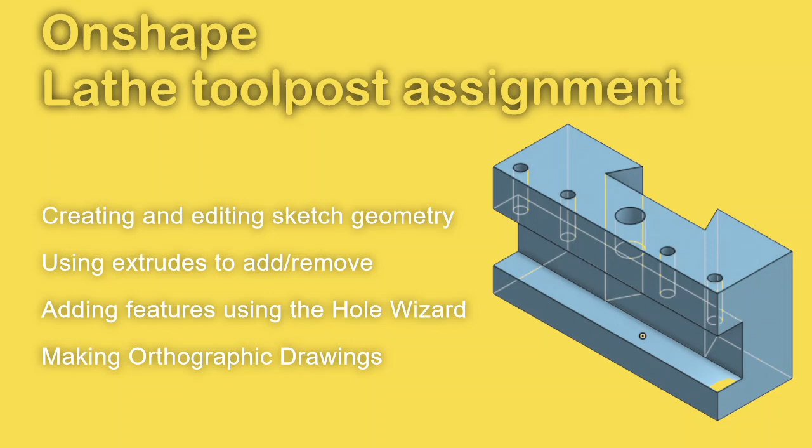Right, we're looking at trying to draw the tool post for the lathe on Onshape, and getting started. Onshape sometimes is a bit difficult until you learn the basics, and then you'll suddenly find you pick up very quickly.

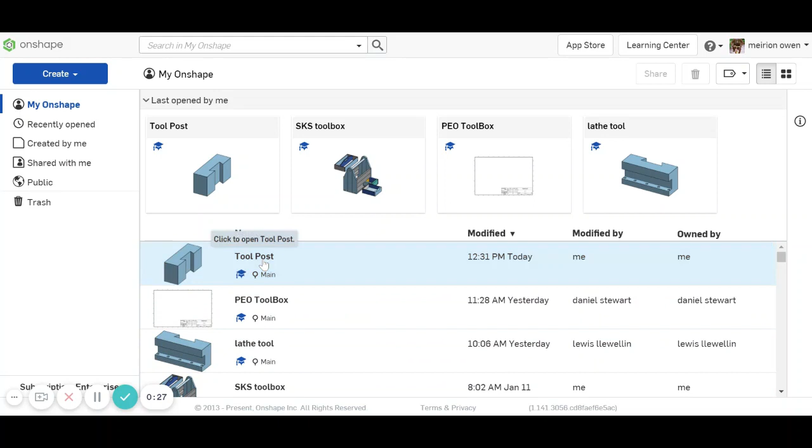Okay, let me just check first of all. If you go to your name at the top here, go to my account, go to preferences, and make sure you're in millimeters. Go back into your Onshape account a second, and go back to the drawing I was just working on, which is there.

Just making sure we're working in the right units. Right, first thing you got to do is choose a work plane that you're going to draw on. So I've clicked on the top work plane there and it goes orange. I could just as easily click on the work plane in the tree by here. It's useful to use the tree, and we'll come more and more into how the tree is useful as we go along.

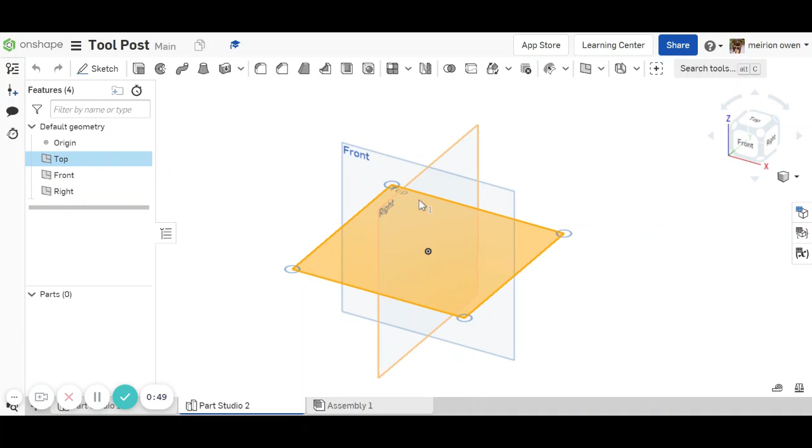Right, so that's my drawing board. Now I need to put a piece of paper on top of it. So if I go to the sketch button, I'm now in sketch 1. Good habit is to get used to labeling your sketches, so I'll call this base geometry, start. Don't tick that just yet, because it'll kick us out of the sketch.

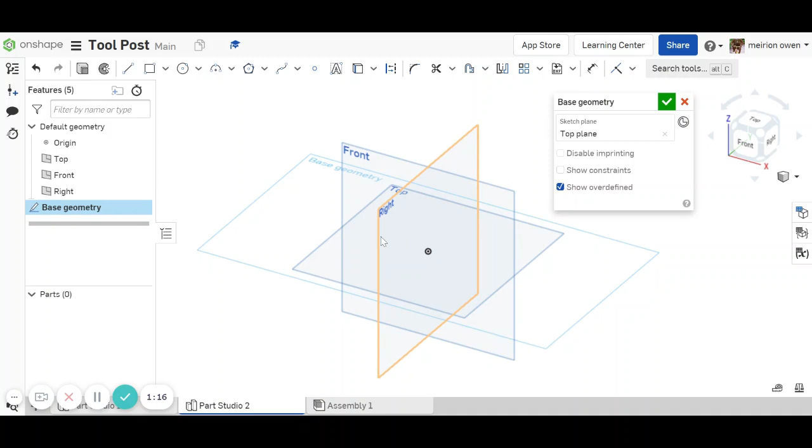Now what I'm going to do is put it into a view where I'm looking straight down on it. So I press the N button and I'm able to look straight down at the sketch. I'm going to start off with a rectangle. My rectangle's up in my draw buttons, and if I look in rectangle, I want to look for a center point rectangle.

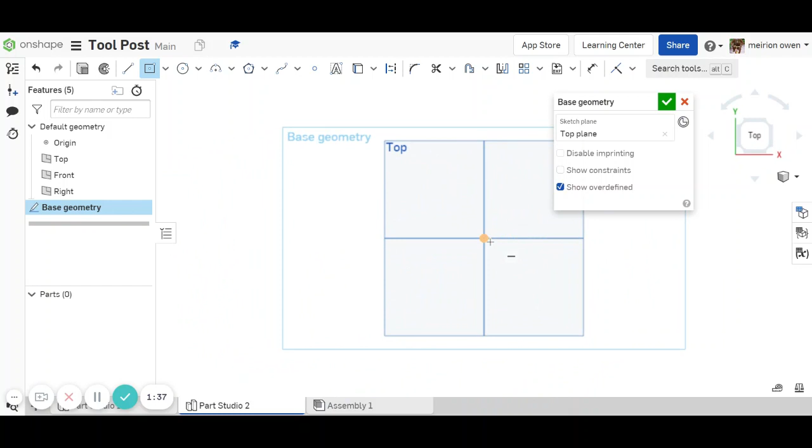Now the dot in the middle is the origin, okay? It's where all of my views meet, so always starting from the origin is a good idea. I'm going to draw a rectangle from the origin, and I'm going to dimension it.

So that's going to be 90 millimeters, hit enter. And this is going to be 30 millimeters, hit enter. So that's the base footprint shape of my tool post holder.

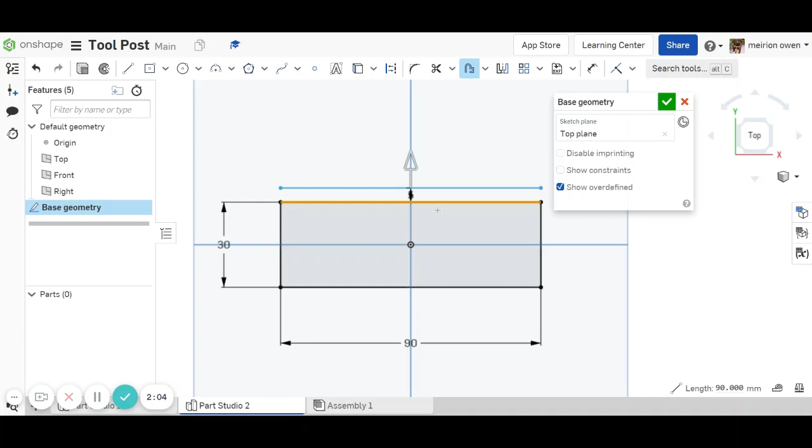Right, next thing I need to do is draw the dovetail slot that goes through it. So I'm going to use an offset button for this. Click on the offset button, click on the edge you want to draw parallel to. Now it thinks I want to draw in that direction, but I want to draw the other way. So click on the arrow, then hit enter once and type in 10, hit enter again.

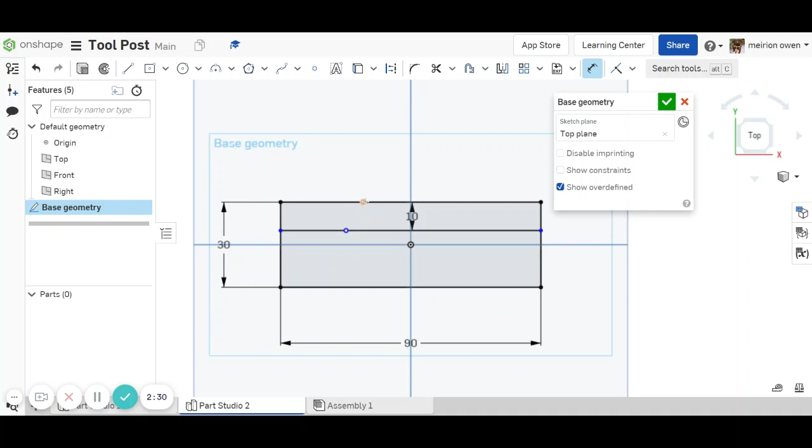Right, so that's an offset or parallel line 10 millimeters away from the first one. Now I'm going to grab my point button and draw a point on one side, a point on the other side. These points are not dimensioned at the moment, so my next step is to dimension them. I'll click on a point, click on the center line, and pull away. My first one needs to be 15 millimeters and my second one needs to be 20 millimeters.

Next thing, grab a line, join the point to the point. That's one half of my dovetail. The other half is symmetrical.

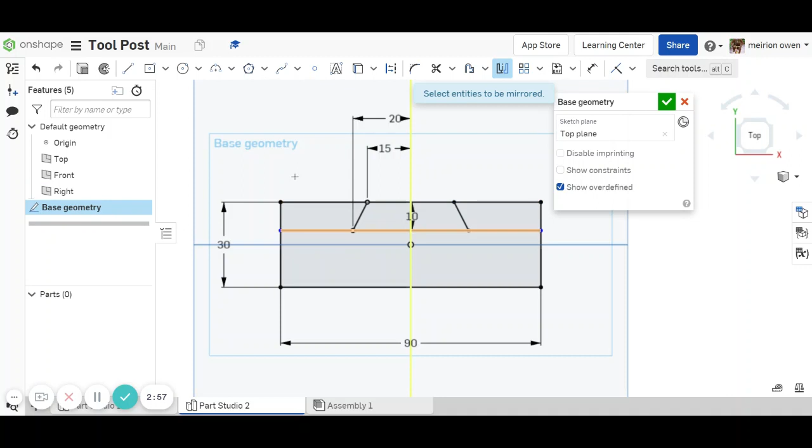So the best thing to do here is grab your mirror button. Select the mirror line - that's our center line in the middle - and then select that diagonal line, and that'll draw my other line across. Pick up the scissors and snip the bits of line that we don't need away. Okay, there is my shape that I need for my extrude.

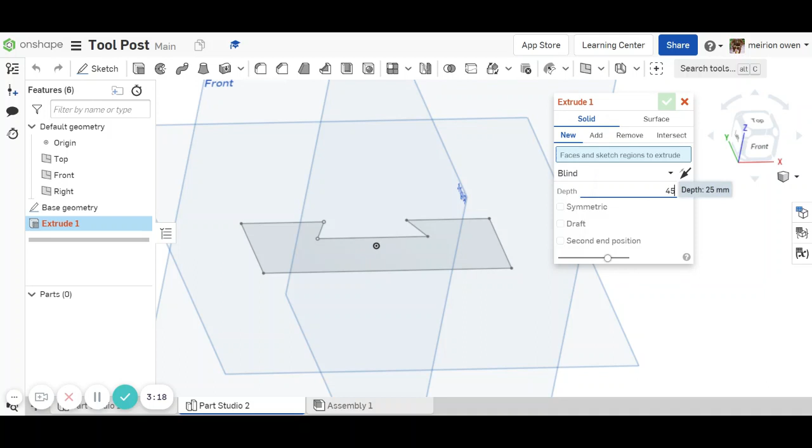So I can extrude from within a sketch, or I can accept the sketch and now do an extrude. Click on my extrude. The height of this piece is 45 millimeters, and you're going to put new material in. So here we go - click on the bit that you want to extrude, and then tick to accept that feature.

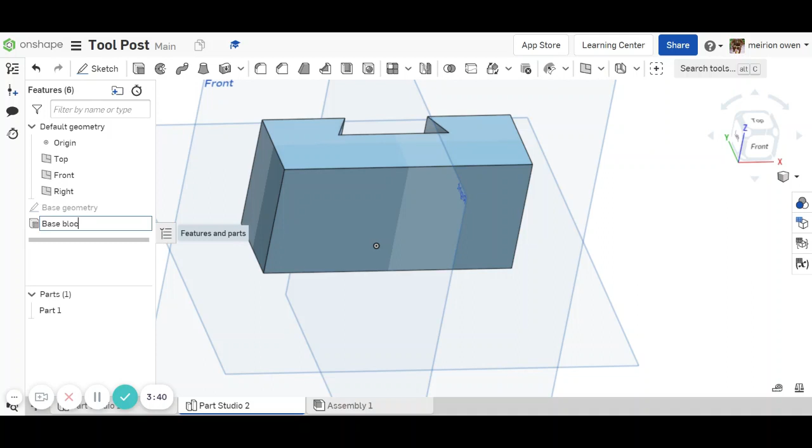So I can see I've got a sketch called base geometry, and I've got a feature called extrude. Now I can rename that feature if I want to, and call it base block, or something to remember. So now I need to put a square slot through the side of this piece.

I'm going to click on that side face there, do a sketch, click N to view onto the sketch, pick up my point, drop a point onto this edge, use my dimension button, click on the point, click on the base, pull across. This needs to be 10.

Okay, now I'm going to draw the rest of that slot in. So I'm going to go horizontal. Now you have to be careful. When you pull lines, you get these indicators - they call them attractor points. And that one there is a little symbol of 90 degrees, so if you click there, you know that line is 90 degrees.

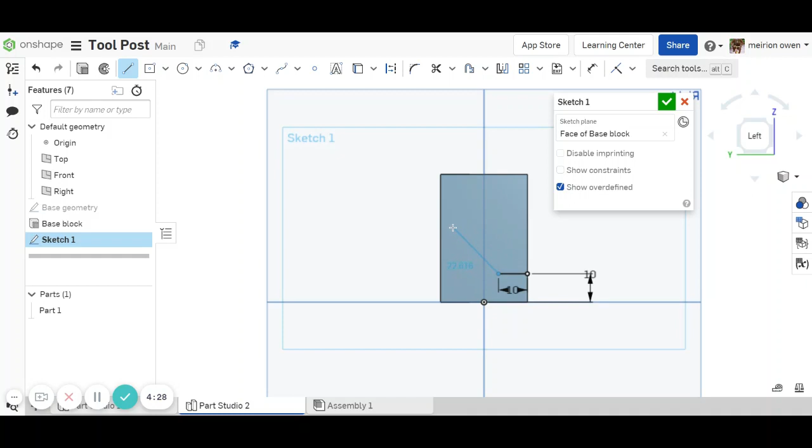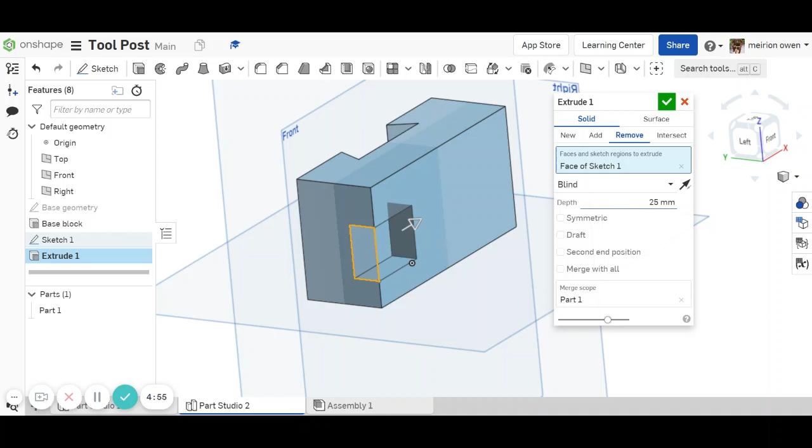So I'm going to go back to my extrude. Don't forget you can do it within a sketch. Now, if you show it the place that you want, it thinks you want to add material, but in fact we want to remove material. I could, if I wanted to, type in 90 millimeters like that, but it's probably just as easy to go through all and then click OK.

So in the last section we saw how we could make the geometry to create this block. And now I'm going to use things like the hole wizard to create some features in the block. So I've got 4 M5 holes to put in the top and one large M10 hole in the center. I'll start with the M5 holes.

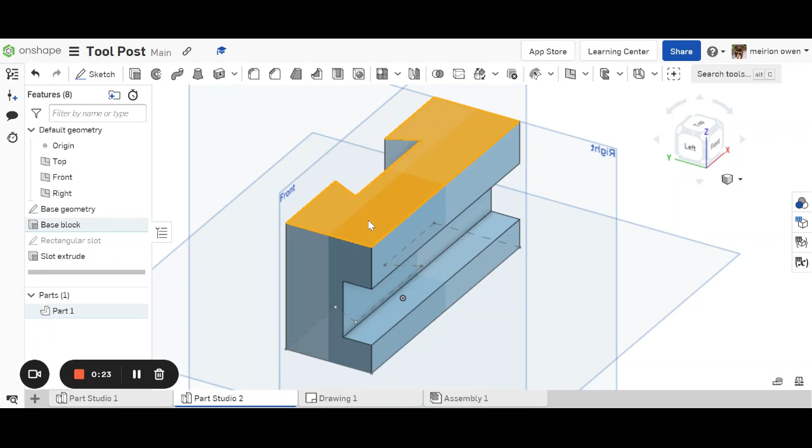So select the surface that you're going to use for your sketch. Click to do a new sketch. Good technique here is to press the N key to view normal to the sketch, 90 degrees to the sketch. And now we're just going to use the point tool to create 2 points - they just don't need to be accurately placed.

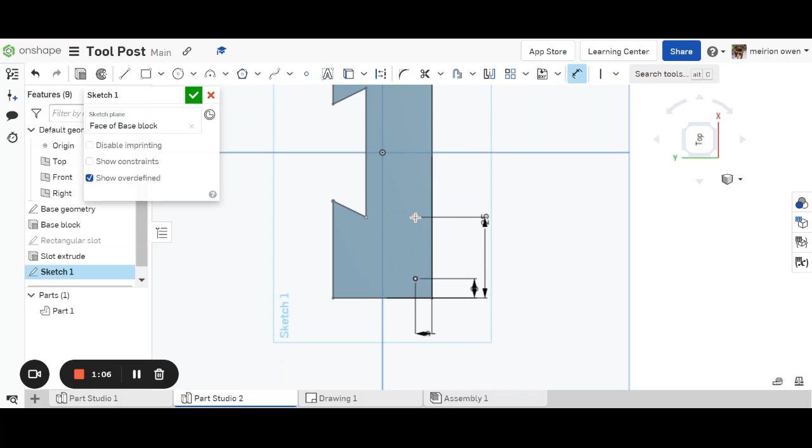We're going to dimension them now. So click on the dimension button, click on the first dot you created in a line - you can dimension that one to be 6 millimeters, and the second one you want to have as 25 millimeters. Now, the distance away from the edge you want it to be 5 millimeters, same with this one at the top, 5 millimeters. That's enough for our sketch - so on our sketch now all I have is 2 dots, 6 mil from the edge, 25 mil from the edge, and 5 mil from this long edge.

And now I need to pick up my hole wizard. My hole wizard is at the top here, and I need to put in some parameters for my hole. So the hole is an M5, metric 5 millimeter hole, and I'm going to put it on this dot, and I'm going to put it on this dot.

Okay, let's have a closer look here. See where it says clearance? That would be for the bolt to fly straight through. I want to have space to cut a thread into the hole, so I'm going to put a tapped hole in, and you can see the hole goes smaller.

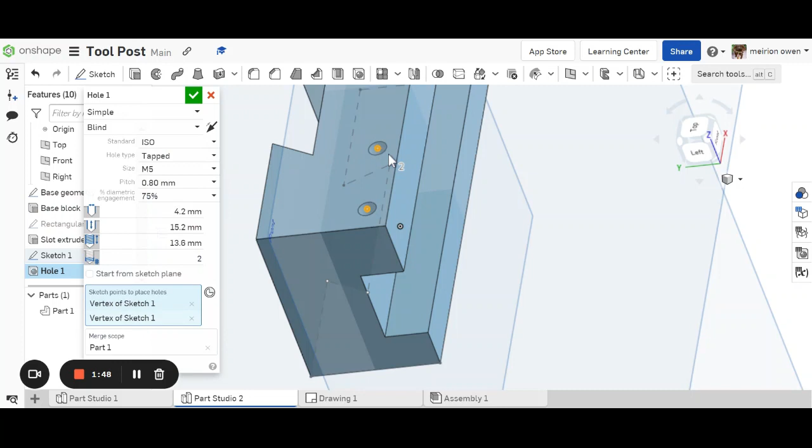Okay, now next job - look, I have got a hole that goes through the top section, but that's more by good luck than anything else, really. Look what happens if I press through - so the hole goes straight through the base. I certainly don't want that.

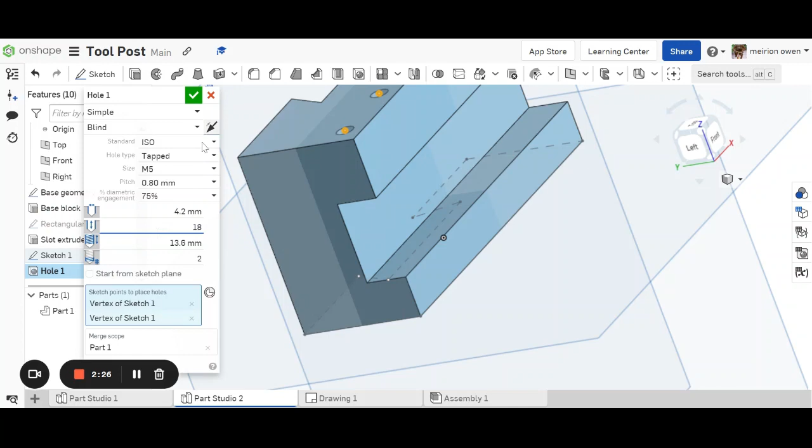So I do want blind, but let's just see how we could get that doing exactly what we wanted. So what I'm going to do is, rather than go blind, I'm going to actually put in a distance for it to run through. So where it's got 15.2, I'm going to put in 18 millimeters - I know that's going to go the right distance into the material.

Okay, so there's 2 holes there, and in my tree now I've got a hole added to there. So what I'm going to do is mirror those.

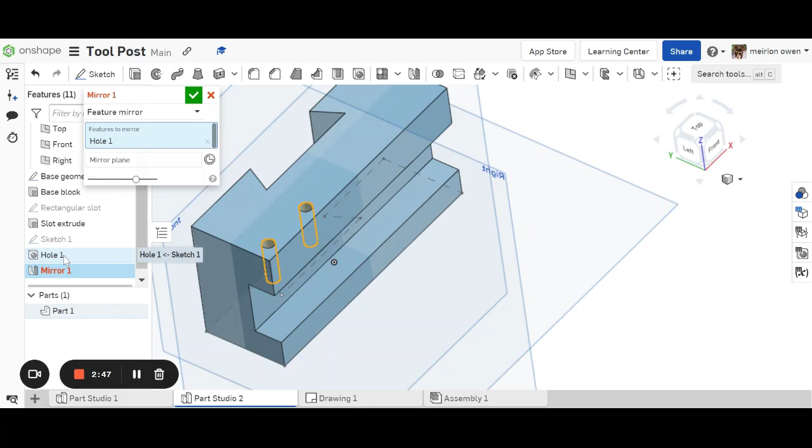So I'm going to go over to my mirror button, and rather than doing a part mirror, I'm going to do a feature mirror. I'll pick up the hole from the tree as the feature to mirror. For the mirror plane, I'll use the vertical mirror plane that goes through the origin, and that's going to draw me the other holes identical on the other side of the block.

Okay, so next job, we've got another hole to put in the middle. So let's do another new sketch in the middle. For this one, I think what I'll do is pick up an inference point. When you hover over a line, you get these attractor points, which let you draw lines without having to measure anything. That line I've just drawn goes exactly halfway along the block, and I want my point for this bit to be right in the middle of that line.

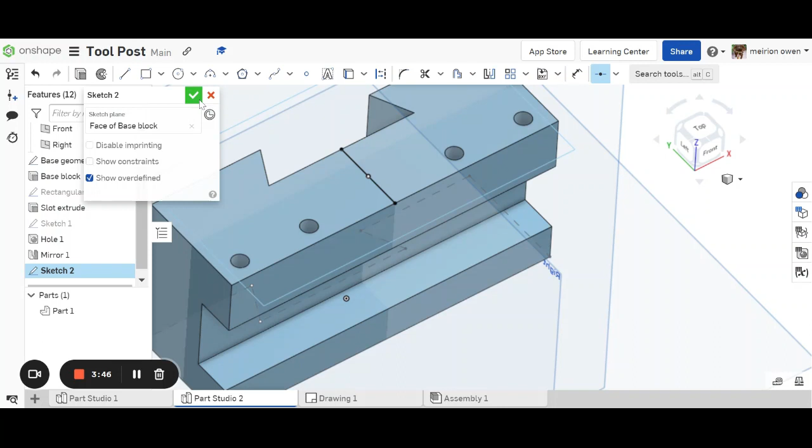Let's do this in a clever way. I'm going to draw a point on that line, anywhere on that line, just down there. Then I'll pick up my constraints toolbar, click on the midpoint constraint, click on the dot, click on the line, and nudge that dot to be right in the middle. Escape my sketch, and I can see I've still got that dot there.

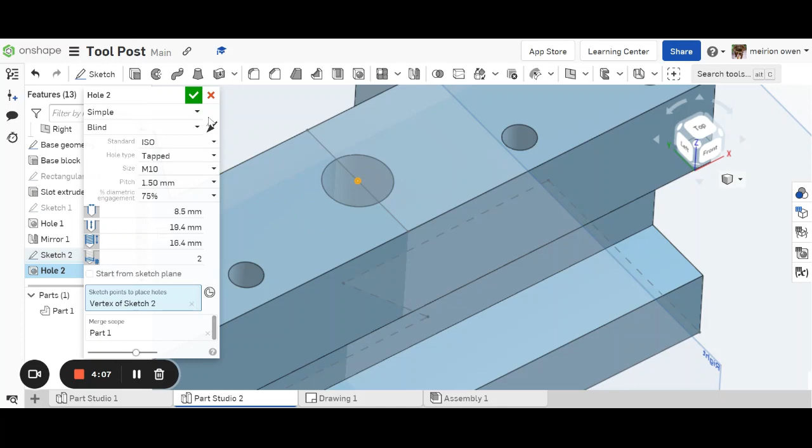Pick up the hole wizard again, and this time we want an ISO tapped M10 hole, much bigger this time around, and the pitch is going to be 1.5 millimeters. Click on the dot, and that's going to create my M10 hole.

Okay, so you can see now when I pan underneath, that hole's gone down too far into the shape. I don't want to go right through like that. Look what I'm going to do — I'll go to Hidden Edges Visible view, so I get a kind of ghosted view of my shape, and I'm going to mess around now with the depth that hole is going into.

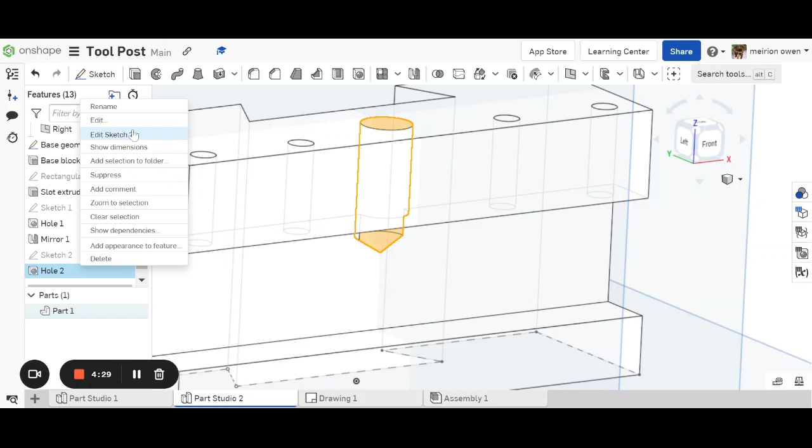So if I go to Edit, and look at that feature, I'm only going to drop that hole down 15 millimeters. In fact, 15 is too long there, so I'm going to try 10 millimeters instead. Okay, so the hole goes in 10 millimeters, which looks about right to me.

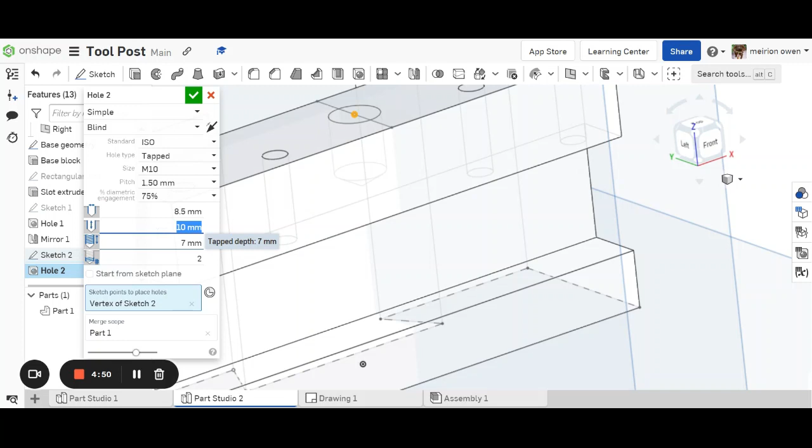Right, the depth of the thread that goes into the hole we'll have as 7mm, that's fine, and that's all good to go. Right, so let's go back into shading with hidden lines.

Let's see that. So there they are — my block is now threaded up with the holes that go through for the clamp for the tool bit, and then this big hole in the center which is used to raise and lower the tool post holder using a knurled finger screw.

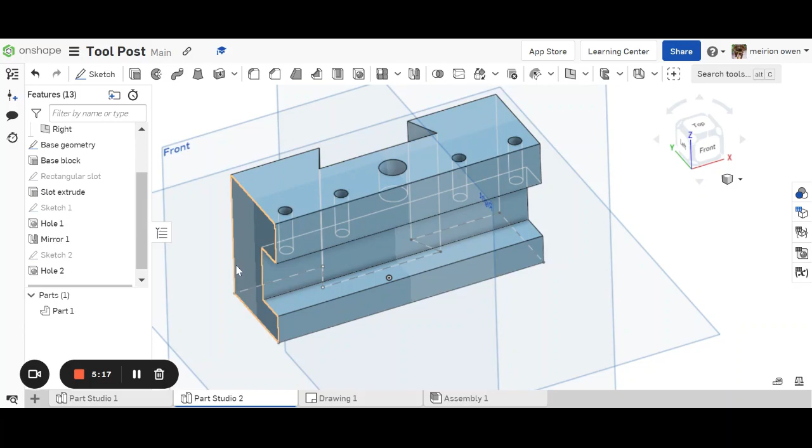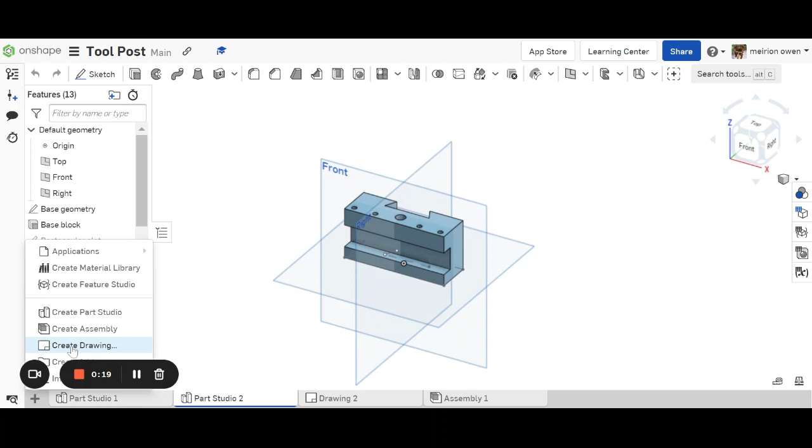Okay, I'm going to talk you through how to go from your 3D model into a set of 2D orthographic drawings. Orthographic drawings are just separate views of the object you've created, with technical information included. So you click the plus button at the bottom, and look at the button that says Create Drawing.

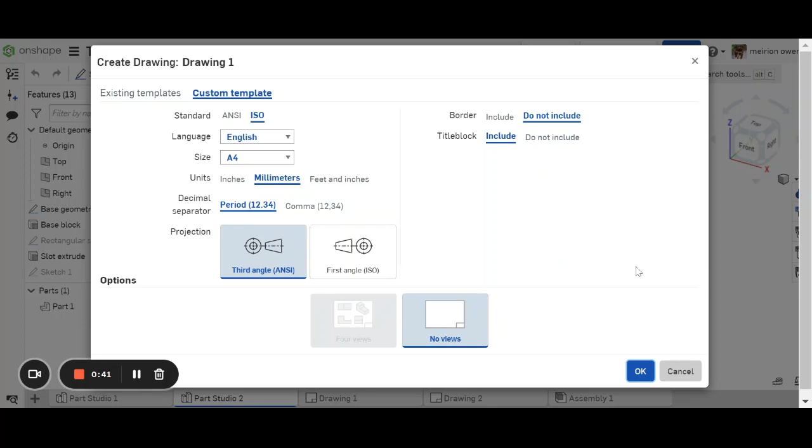When we set the drawing up, we've got a few things to look at. We want to click on the Custom Template button, then try ISO, and set the size of your page up. I'm going to go for an A4 page because this tool post isn't too big. I click on the third angle projection symbol, and I'm going to click on Do Not Include a Border. Click OK, and it'll take a little bit of time to generate a blank page.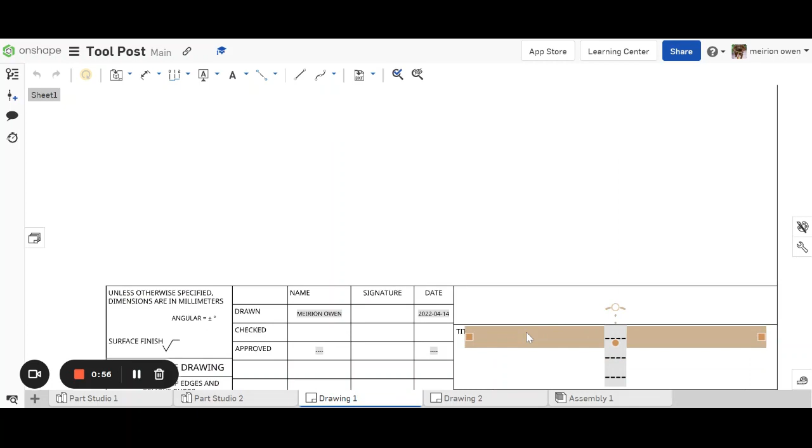Now, once you get your blank page, it's already going to try and give me some tips as to what I want to do, but I'm just going to close those off a second. So my blank page is set up quite formally. There are things in here that you need to make sure are included — so you've got a title block at the bottom down here, and you can fill in details on the title block. For example, the title of your drawing, you can put in as lathe tool post.

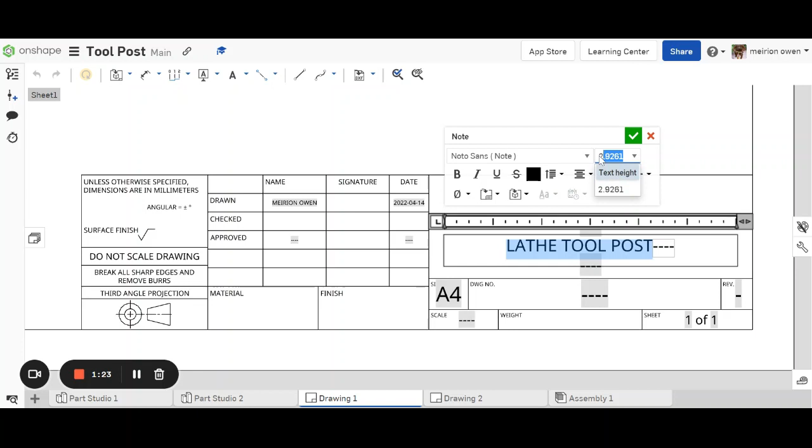Look, lathe tool post. You can change the size of that drawing or that writing if you want to. You could make it slightly bigger for this one. I'm going to make it 5mm and bold, and OK that. So you can put in details such as your name in here. It might actually give you your name here already. You can put tolerances, what materials it's made from, and the finish and things like that. So there's your title block.

It also gives you a page where you can insert your view. So let's get on with that. What we need is 3 views in orthographic. So you go up to this button that says Insert View. There are a few different things we can explore down here, but we're starting with Insert View.

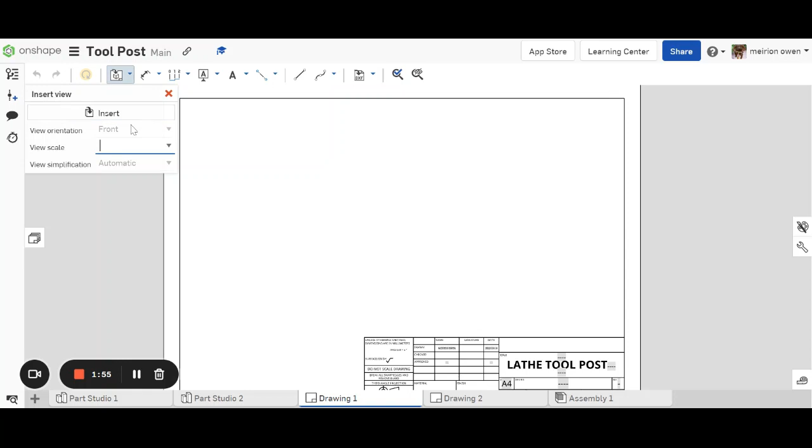Click on the Insert button, and you've got the drawings that you've created. So I think Part Studio 2 is where I'm looking. Yes. So if you click on Part Studio 2 and bring this in, it'll start to create a view of your object. If you don't like that view that's generated for you, you can choose a different view.

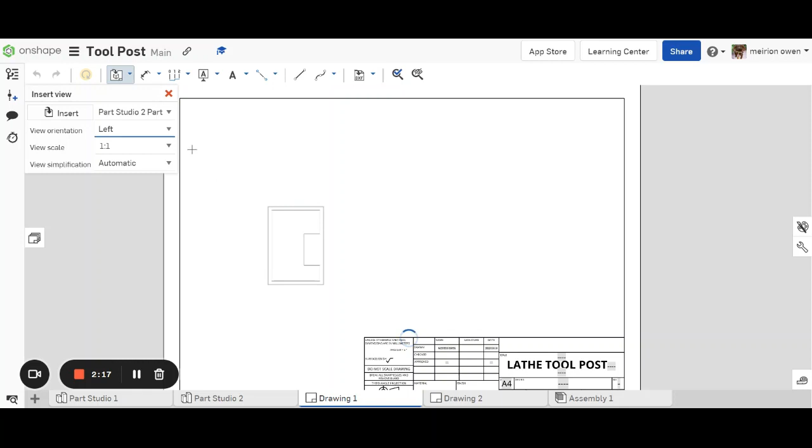But I think I'm going to go with the view it gave me. So I think that was my front view, was it? Yeah. Okay, so 1:1, what does that mean? That's scale - it'll tell me automatically whether it thinks it needs to shrink the object down to half size, or whether I can include it full size in the drawing. In this instance, full size will fit on there quite nicely. So I'm going to have one view drop in here.

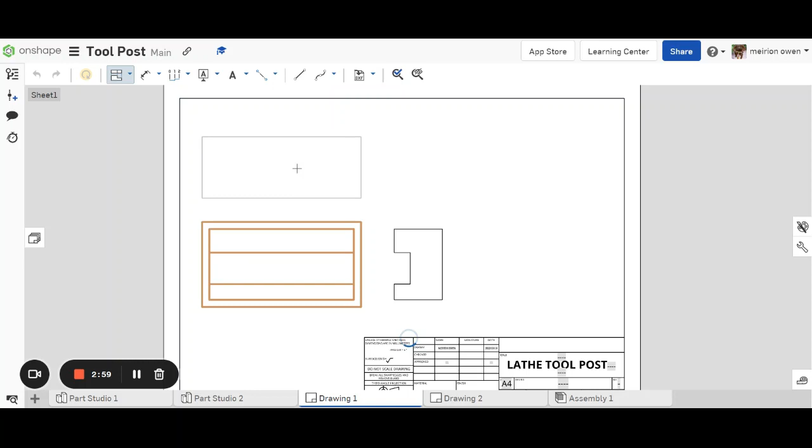Now I'm in a mode called projected view. So if I just hover to the right-hand side of that view, it's going to create what it'll see if it looks from the right. It's third angle projection, so it's giving me a view that looks like that. Okay, I want another view above it. So if I click on the parent view and go above, it'll create a plan view of the object. So that now - let's press the escape button - is 3 views in what we call orthographic projection.

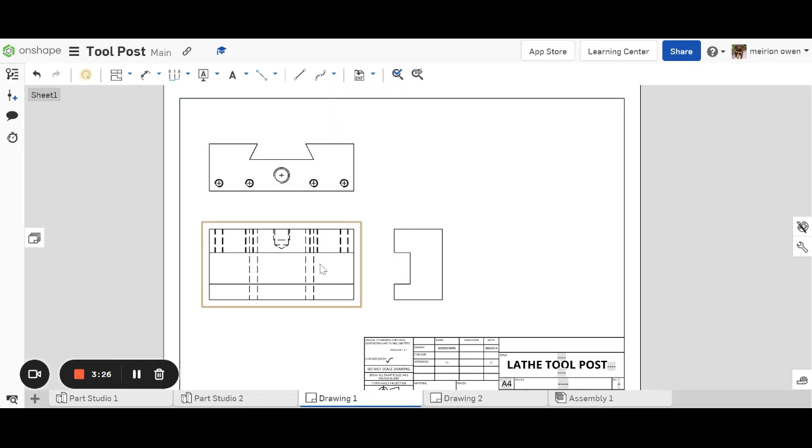Okay, let's see what other details we can put into our drawings. If I click on this view down here, right click on it, and then go Show Hide, Hidden Lines, I can add in the details that you can't see because they're inside or behind where you're viewing from. That's quite nice. Now, this view down here, I'm going to delete for a second. I'm going to change that view to what we call a section view.

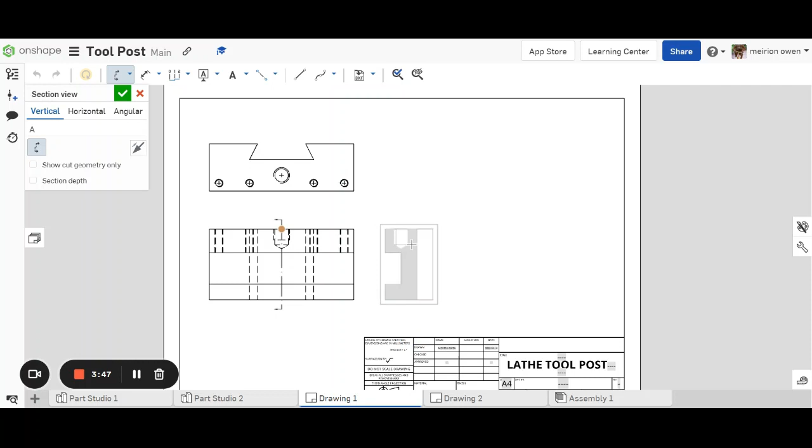For a section view, you can choose a vertical, horizontal, or angular section plane. We're going to leave it in vertical. All I need to do now is pick up a point where I want to slice the object through. Now drag to the side, and I should get a nice cutaway view through the object that shows me what I would see if I sliced that in the middle. Okay, a couple of little things I don't like now.

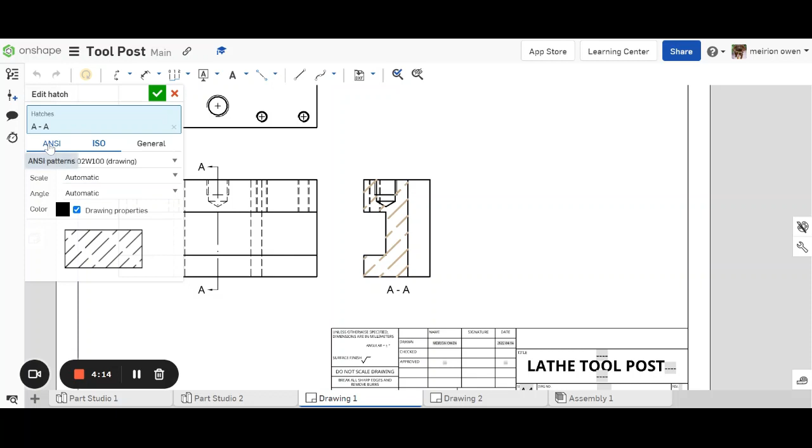We're in that drawing format, which means we have certain standards applied to our drawing. I'm going to go to Edit Hatch for a second, and I want to pick up this hatch in the middle here. I don't like this broken hatching line, so I'm going to click on the ANSI button and have it so it's solid hatching lines. Okay, so look what I've got there now.

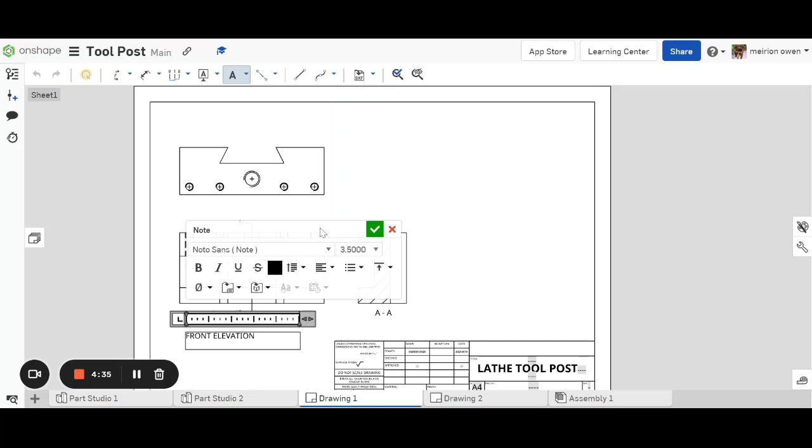I've got a front elevation, front view, a plan view, and an end elevation. Next thing I'm going to do is label those views up. This is called my front elevation. This one is called my plan view - just call it a plan. This one is my end elevation, but it's a cutaway view, so we call it a sectional end elevation.

You've got to say which plane you cut on. So I've cut on a plane called AA.

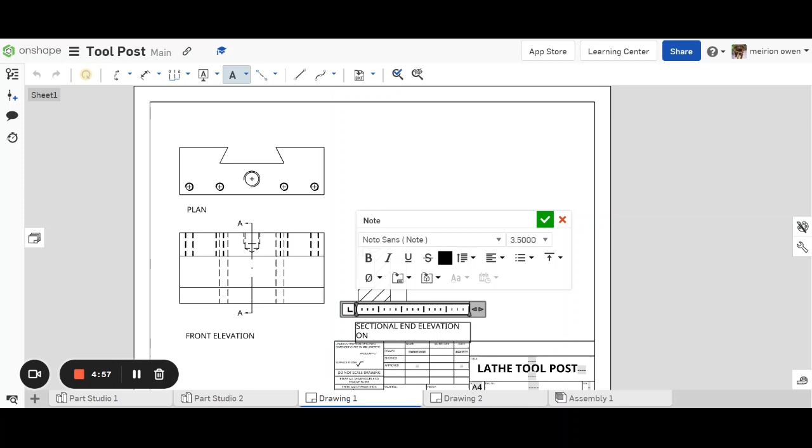Okay, if I double click on that again in a minute and stretch this out, I should be able to get it all to go on one line. That's labeled my section plane, but I don't need that section plane labeled now because I've done it in my view label.

What else can I add to that drawing? Well, I should add some stuff to it, such as dimensions. When you dimension a drawing, you're going to use a dimension wizard and start adding sizes. Now be very careful. In the CAD part of your folder, you'll see I've put in the standards called BS 8888, and they're very clear about how you add dimensions to drawings.

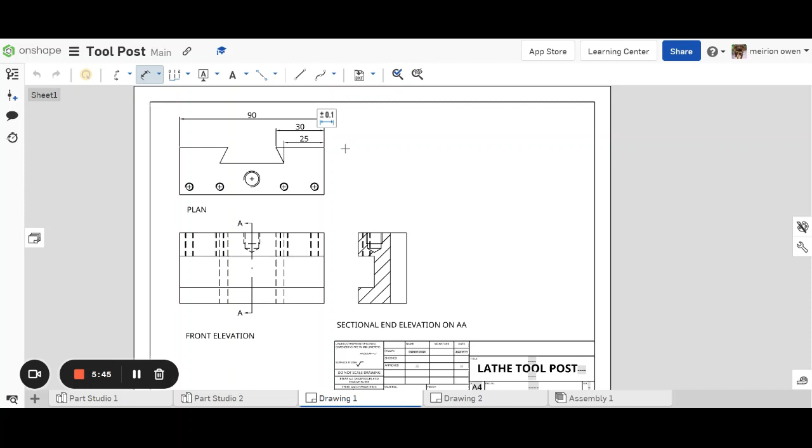You're not meant to run dimensions through each other, so put your biggest dimensions at the top and stagger the other ones inside it. You can't put too many dimensions in a drawing—well, you can, I guess—but you have to be careful that you don't over-dimension a drawing, and also don't leave the user to try and work out dimensions.

If a dimension isn't going to fit between lines, so if it's a small size, under 9 millimeters or 9 millimeters or under, then the dimension should go outside the object, outside the line. You've got to put your dimensions in so we can see how this object is going to fit together.

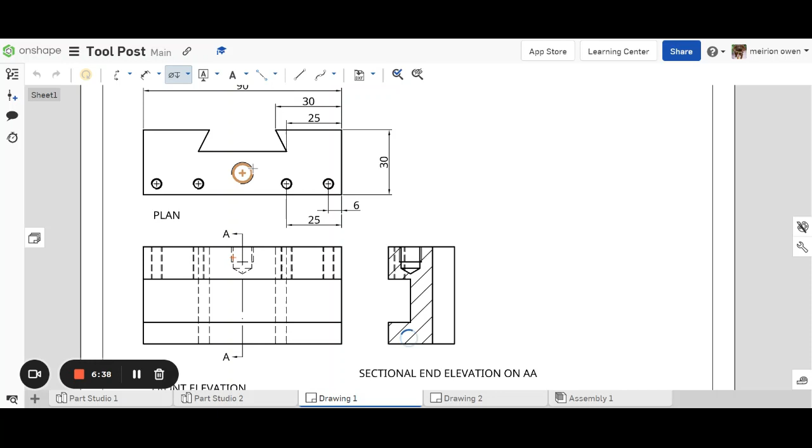Now there are some other dimensions you can put in there that are quite cool, such as information dimensions. So if you go to the hole dimension, the hole callout, and click on this hole here, for example, and pull up—what this does is tell us information such as the diameter of that hole is 8.5. We know it's a tapping diameter for M10.

So the hole's 8.5, and this little sign here, this line with the arrow coming from it, is the depth dimension. That goes in 10 millimeters, that hole. And then cut into that hole, into the 8.5 hole, is an M10 thread with a pitch of 1.5. The depth it's threaded to is 7 mil, because it's a blind hole—we don't want to drop a thread right down to the bottom, or we might break the tap.

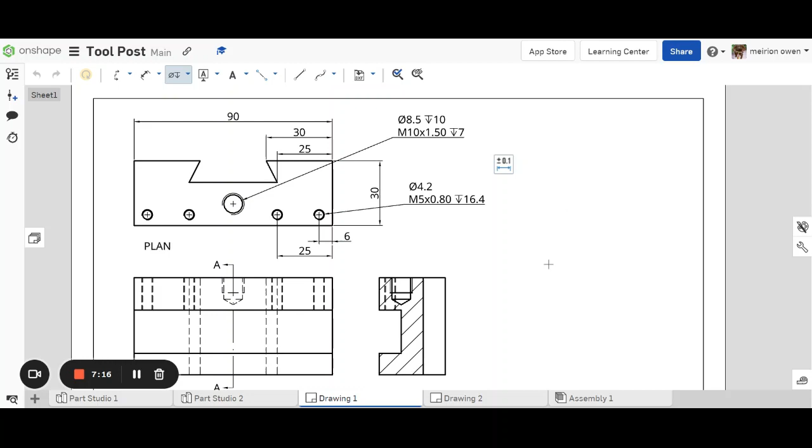Okay, you can do another one of those dimension buttons, and you've got similar dimensions related to the M5 hole there. Right, let's see what else we're going to put in. I've got some circular holes that drop right through here, but I can't really tell they're circular from that view—although if I look at the plan view, I could say they're circular.

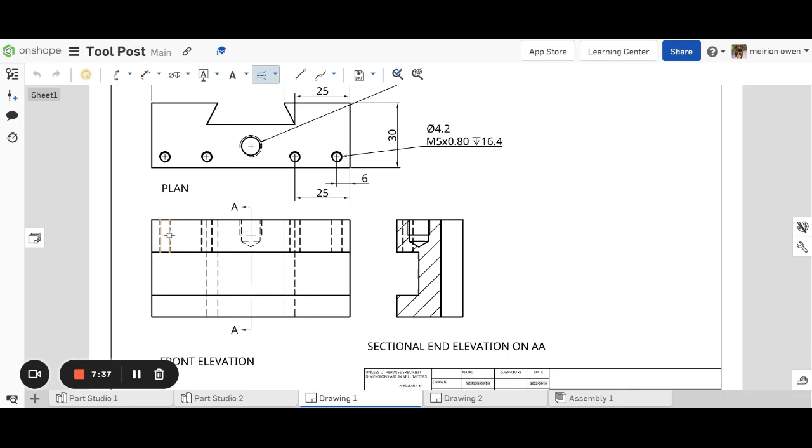A good thing to do if it's an object that's circular is to put in a center line. So I'm going to use my edge-to-edge center line and drop a center line in the middle of each of these screw holes. If you need to zoom in a bit, do so, that's fine. I'm going to put dimension lines into these pieces by here—center lines, sorry, then dimension lines.

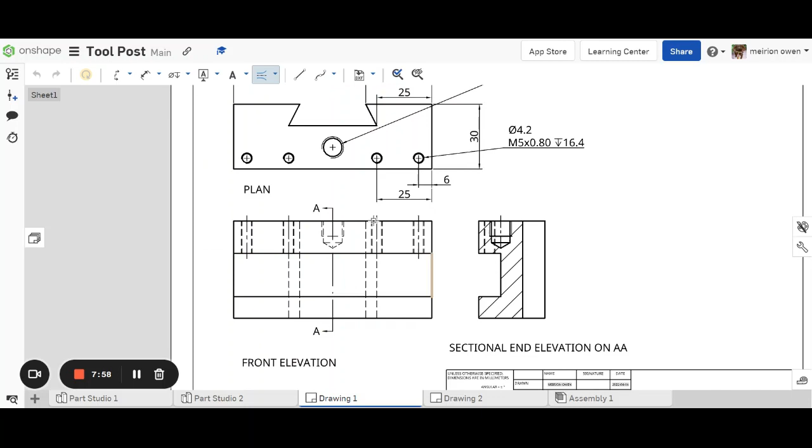Put center lines in all your vertical shapes. It just so happens that it's given me centers for these. If you haven't got centers on your circles, you can put them in with a center mark as well—you click on the middle and it draws a little cross in the middle. So we need to dimension that up fully.

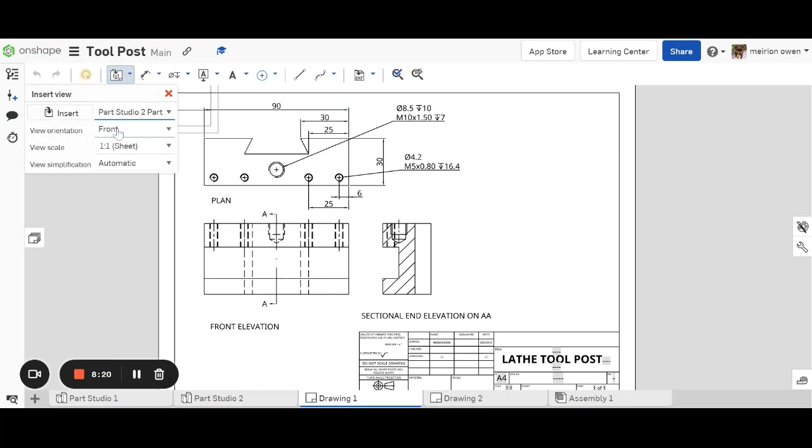Now let's see what else we've got, because we've got a bit of spare space on this side of the drawing. So I'm going to go to my insert view and look at the isometric view that I get of this object. There's my isometric view, look. Now if it's slightly too big—which I think probably it is to fit in that part by there, or is it? No, we'll leave it one to one size.

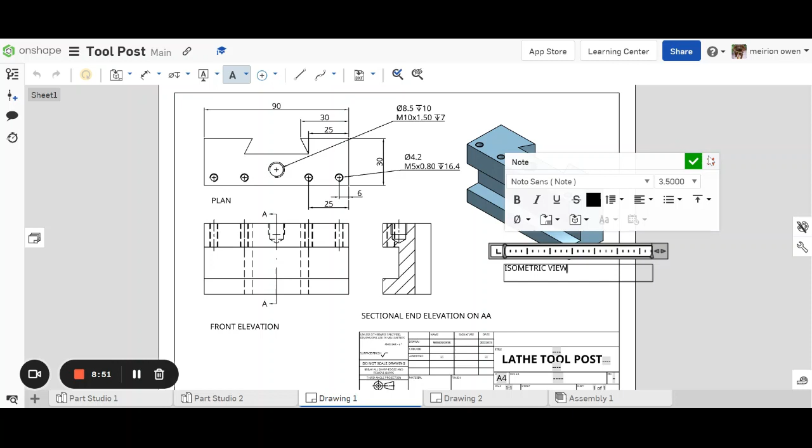So I'm going to drop that view onto the page, and now what I'm going to do is click on that view, show/hide, and show a shaded view of that object. So that's my isometric view. Let's label that up as an isometric view. Here we go—ISOMETRIC VIEW.

Okay, so I've got an isometric view, three orthographic views, one of which is a sectional view, and I've added dimensions, center lines, and hidden detail. So see how you get on with that.